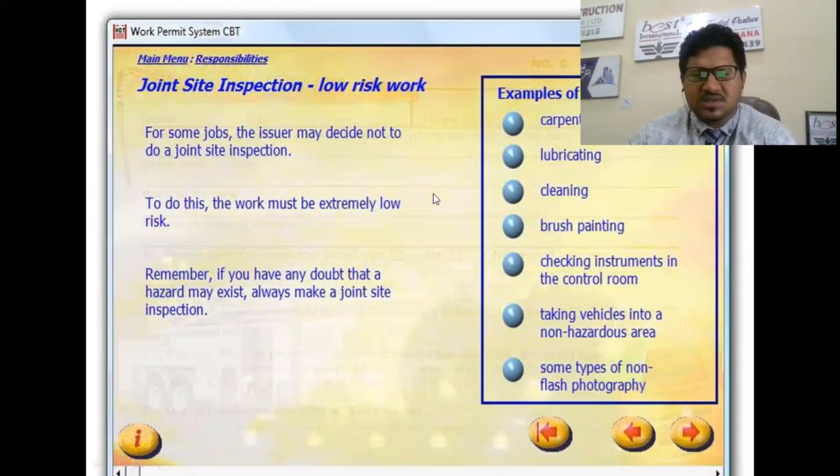For some jobs, the issuer may decide not to do a joint site inspection, but to do this, the work must be extremely low risk. Remember, if you have any doubt that a hazard may exist, always make a joint site inspection. Examples of low risk work may be carpentry, lubricating, cleaning, brush painting. So, who goes on a joint site inspection? Remember, issuer and receiver.

Now, why do we need a fire watch? A fire watch must be assigned anytime work is done where a fire could occur. Examples: when working on or near in-service hydrocarbon equipment, doing a hot tap, working near combustible materials, or working near open sewers or sumps. You may also need a fire watch when a release of hazardous liquids or gas permit is issued.

So remember, guys, whenever, wherever a fire could possibly occur, you need a fire watch, and make sure you have it, and it must be accurate on the hot work permit, like the name of the fire watcher and the ID of that fire watcher. You need to agree and sign the permit.

Now, fire watch, who is he? The fire watch is usually an operator, but he could be from maintenance or a contractor if operations and maintenance agree. Any fire watch must have had fire training and know how to use equipment like fire extinguishers or hoses, and he must know how to report a fire. He must check the work site to make sure all safety precautions are in place. So these are very straightforward responsibilities of the fire watcher.

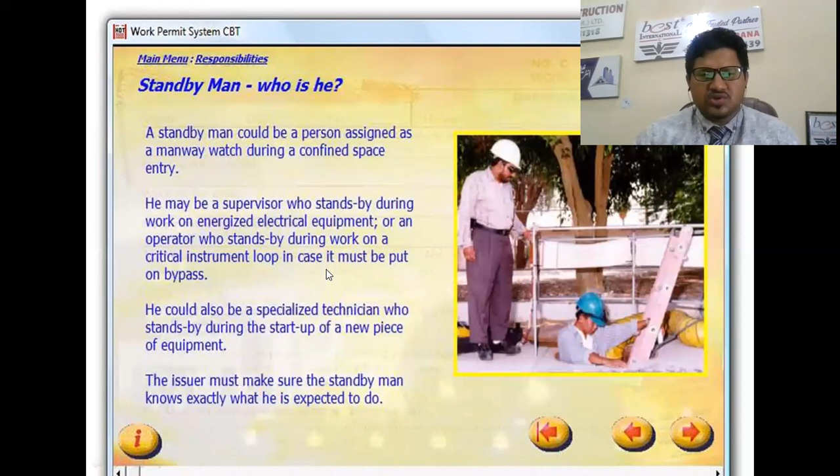Standby man: yes, we need a person who will stay outside at the entry point, and he must be reporting to the CSE supervisor. And on the other side, he has no other duties. He must make sure that everyone who is going inside is filling the CSE log sheet. And the issuer must make sure the standby man knows exactly what he is expected to do. So make sure the standby man is also very clear about his key responsibilities as a standby man.

Now, when should a fire watch be assigned? Whenever a fire could occur. You just need to remember any hot work when gases are above 0.0 LEL for high risk. But the most appropriate answer is whenever a fire could occur. What would the issuer require when welding on in-service hydrocarbon equipment? We need a fire watch, quite straightforward, right?

Now, what must the fire watch be? He must be trained. And on the other side, to be very honest, he must be certified as well. That's why they have started asking, where is your third-party certificate and ID as a fire watcher? Now, the fire watch has to know how to operate fire equipment given to him. That's the right option. Question number 5: what do we call the person who is required to be at the job site because of a special skill he has? We need a standby man.

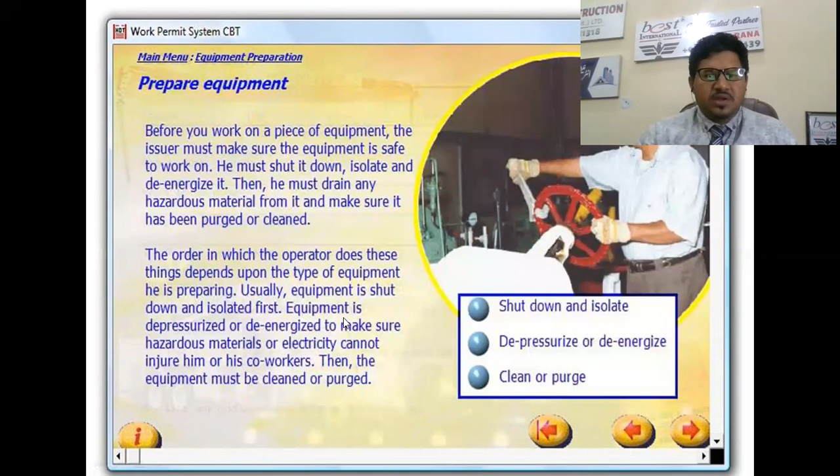Purging is important, and why we need it. This is done to remove hazardous material and it's called purging. Purging is a safe way to remove flammable and hazardous material from inside equipment. It will bring down the LEL towards 0%, and it may remove oxygen content as well, because nitrogen displaces oxygen, and if there is not enough oxygen, of course, people could die.

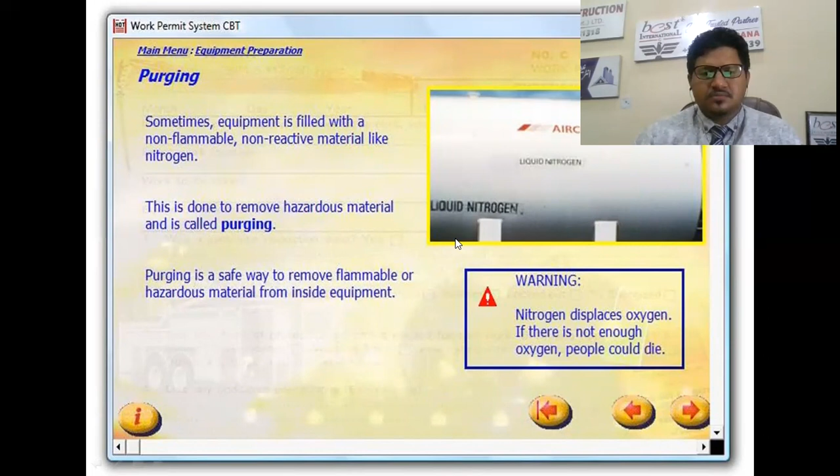Now, clean equipment: cleaning is done to remove all traces of flammable or toxic material that could injure people. This is usually done by steaming out the equipment or using a water wash. Cleaning at this stage refers to cleanliness. So for the cleaning process, just remember you are using either steaming or water wash.

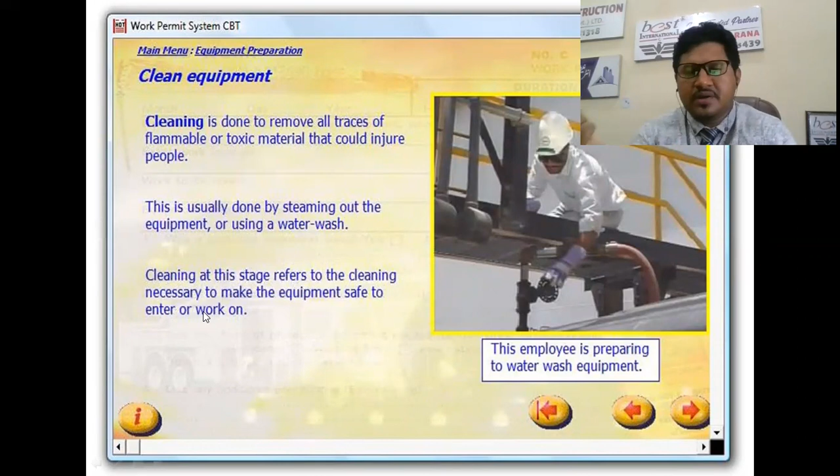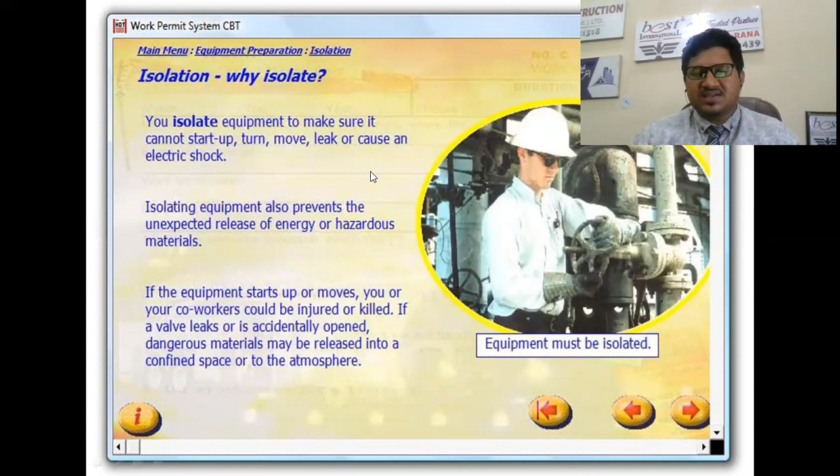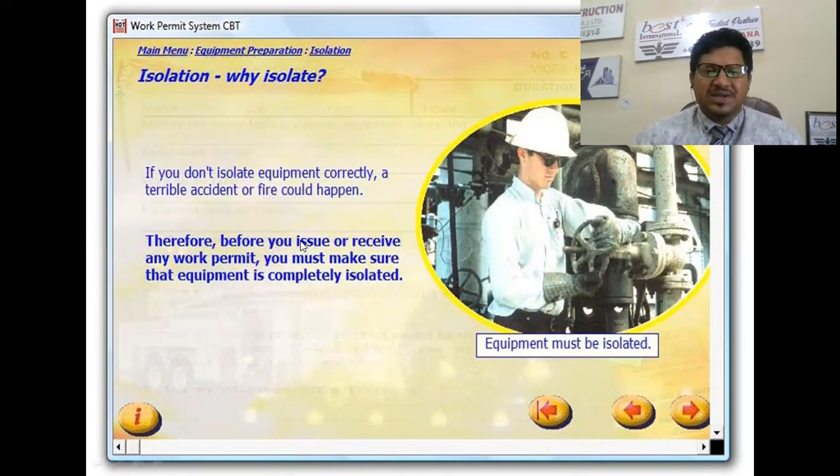Isolation, why do we need isolation? We don't want any accidental startup or unexpected release of energy while we are working at the project site. So make sure you properly isolate the equipment, and there shouldn't be any chance, even accidentally, to release dangerous materials, especially in a confined space. If you don't isolate equipment correctly, a terrible accident or fire could occur. Therefore, before you issue or receive any work permit, you must make sure that equipment is completely isolated.

Now, what should we isolate? Different kinds of energies we need to isolate, or different equipment could be there, like electrical equipment, mechanical, hydraulic, air, gas operated systems, vessels, pipes, confined spaces. We need to isolate before we start our maintenance or inspection or other projects like overhaul or shutdown.

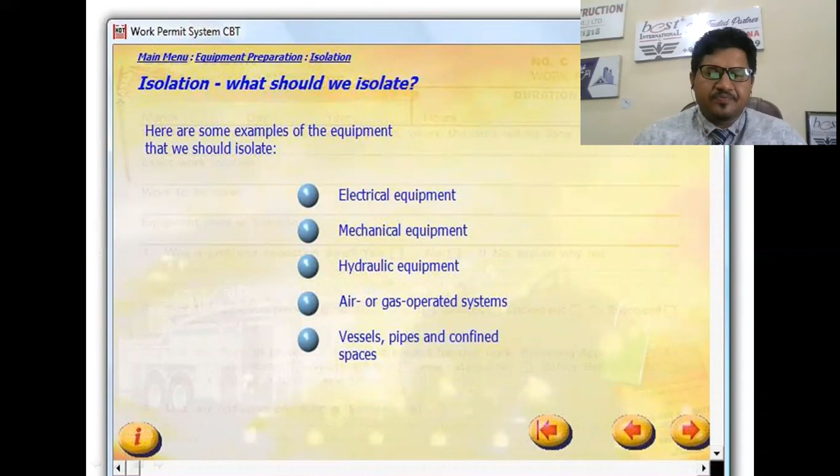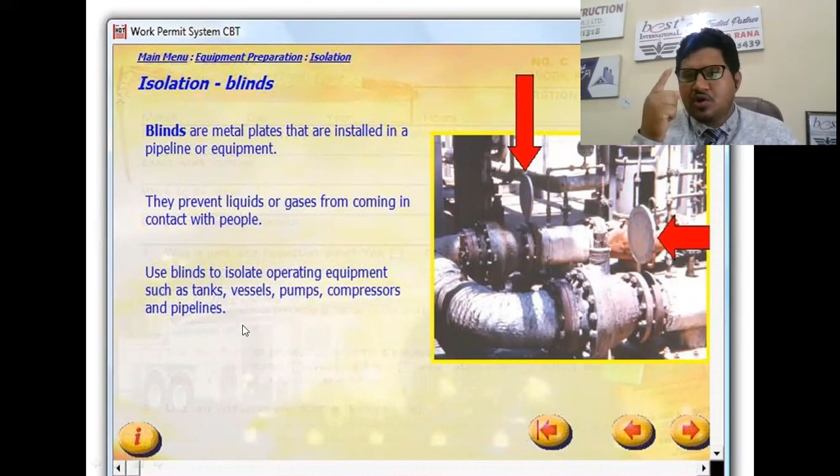Now, how do we isolate? Install blinds, remove piping, close and chain valves, open electrical breakers, remove fuses, disconnect wiring. We can use blinds; these are metal plates that are installed in the pipeline equipment. They prevent liquids or gases from coming into contact with people. So use blinds to isolate operating equipment such as tanks, vessels, pumps, compressors, and pipelines. But make sure facility-made blinds you can only use once, and then you have to destroy and waste them. Look at the picture. We can disconnect also.

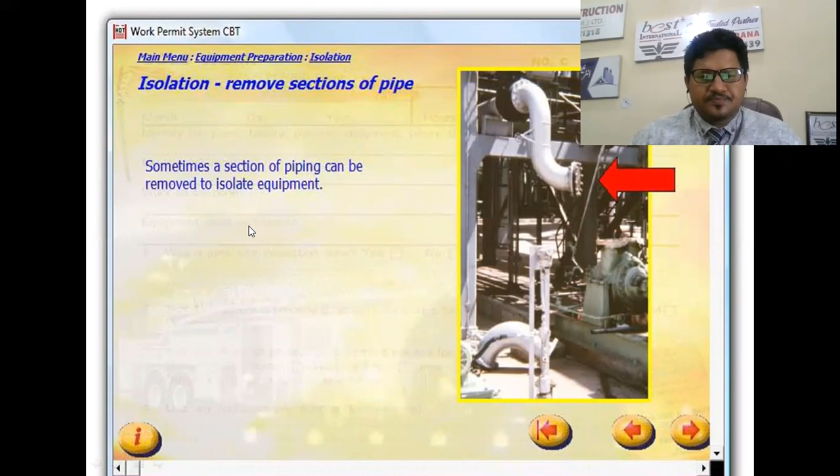Otherwise, we can use chains to prevent a valve from being opened by accident. For electrical isolation, we need qualified electricians, first of all, to disconnect wiring or remove fuses if breakers cannot be locked in the open position, or open breakers. Now, what is the question? This is an important one. When preparing equipment for maintenance work, the issuer must make sure of what? Shut down, isolate, and de-energize. They have to make sure.

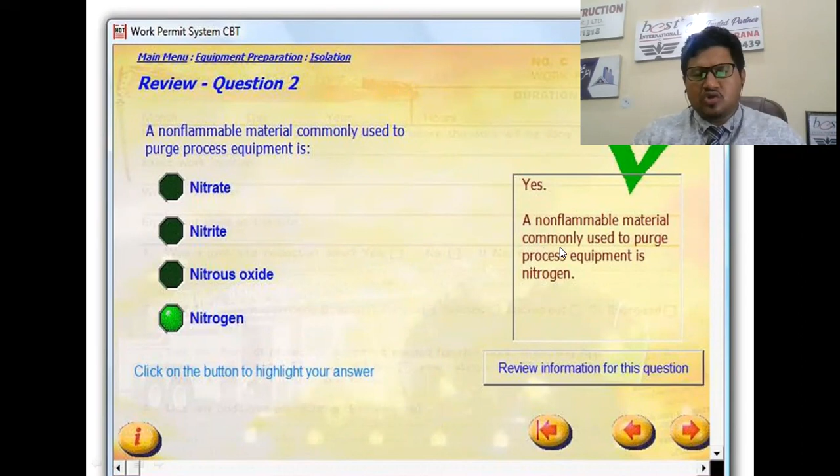A non-flammable material commonly used to purge process equipment is nitrogen. We use nitrogen, a non-flammable material, meaning no flammability. Two common methods of cleaning process equipment include water washing and steaming. That's what you studied. Now, equipment is isolated to make sure it cannot be started up, leak, or cause electric shocks. Choose two methods for isolating equipment: remove piping, or install blinds. So blinding and disconnection are both acceptable methods for confined space isolation.

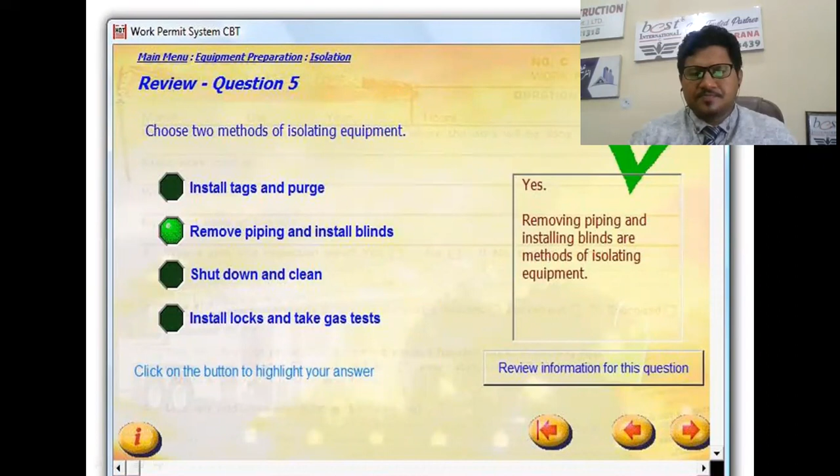Now, removing fuses from an electrical circuit or disconnecting electric wiring is an example of what? Isolating electric equipment. So your concepts technically must be clear. So I hope all these questions of the work permit system of Saudi Aramco will be helping you.

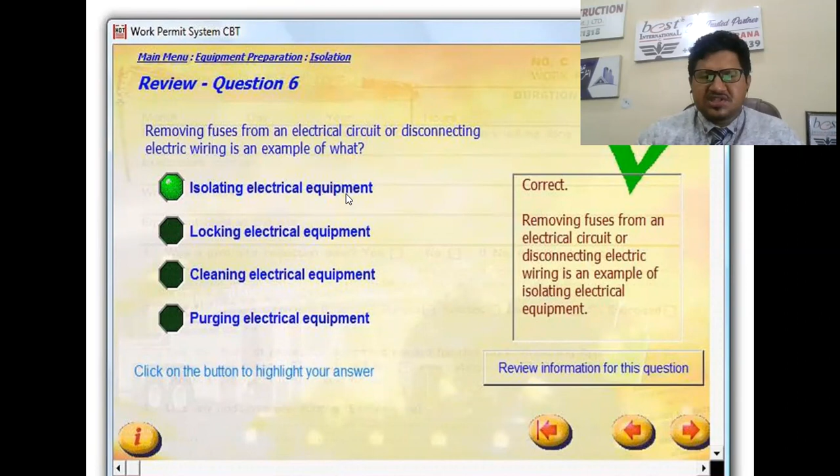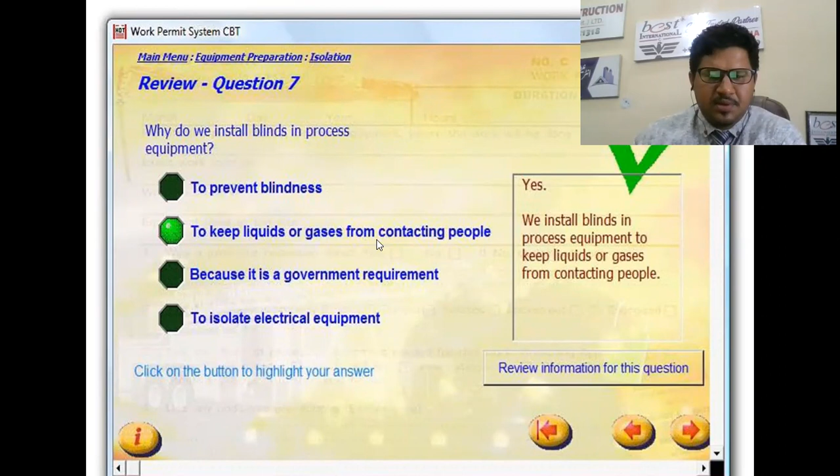Yes, locks and tags must be used in sequence. And remember, operations must install their locks and tags first. So one lock, one key. This is the only program where you should never trust anyone. Your life, your responsibility. You have to put your lock and you have to remove your lock. Don't trust anyone. You can't even say to someone, oh, take my key and just open my lock and remove it. No, don't trust.

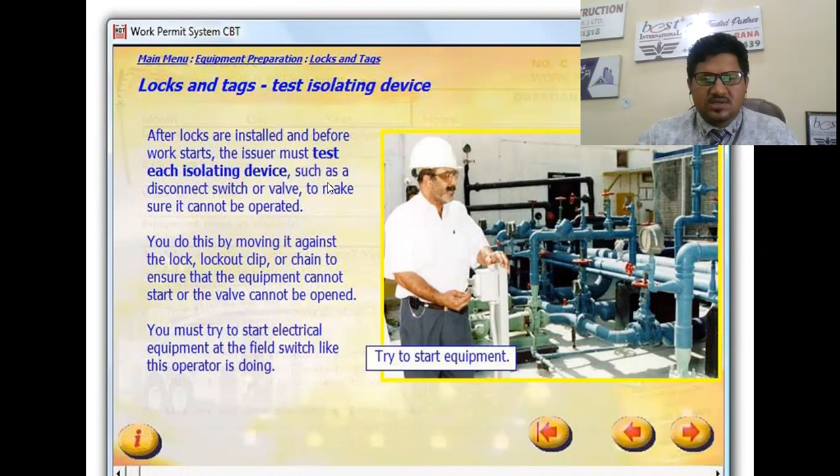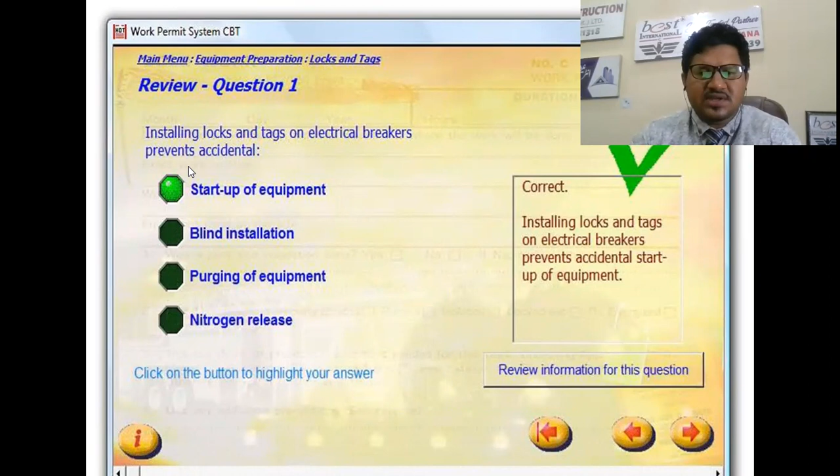So make sure, after locks are installed and before work starts, the issuer tests each isolating device, such as a disconnect switch or valve, to make sure it cannot be operated. If there are multiple locks, we can use multiple lock clips like this, which allow several locks and tags to be installed at the same time. Now the important questions: installing locks and tags on electrical breakers prevents what? Startup of equipment. Why do we install tags with locks? To explain why the lock is installed.

Who from the work crew installs locks? One member from each work crew, but make sure they are authorized and trained. When operators change shift, the new operations supervisor reviews all isolated equipment. He must also review the locations of locks and tags. Operations locks and tags may be left installed, and between shift changes the keys to operation locks may be transferred to the new shift. This only applies to operations locks and tags at a shift change.

Question: the issuer must try to start up equipment at the field switch after it has been isolated and before work starts to make sure... Multiple options are there. Remember, it cannot accidentally start. That is the answer. What happens to operations locks and tags installed on equipment when operators change shift? The keys are usually transferred to the new shift.

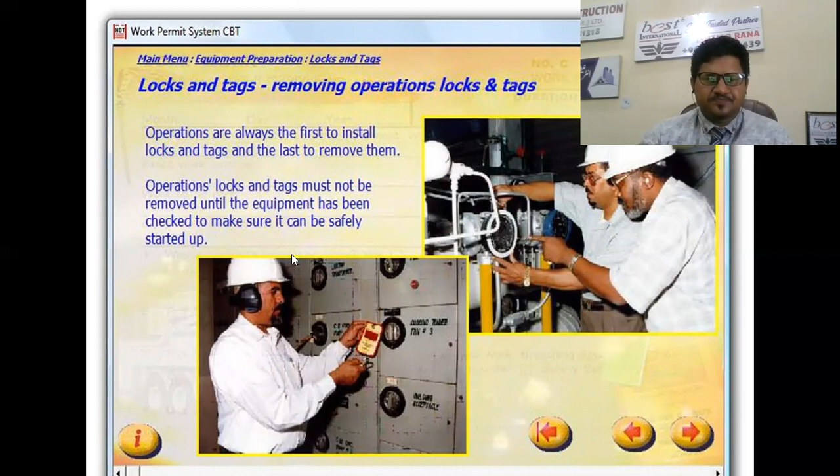So you can study this material. Let me just complete the questions and answers for you. These slides you can study by yourself; one picture is louder than 1,000 words, so see how the pictures are self-explanatory. GI 6.012 belongs to this one. Now the question is, who should be the first organization to install locks and tags? Operations will be the first one to install the lock and the last one to remove the lock. What must operations do before removing their locks and tags? Make sure equipment can be safely started.

Okay, so different types of permits are there. You can study them by yourself. Different permit formats are there. I'll share maybe one more video: what new changes are there in the new permit forms?

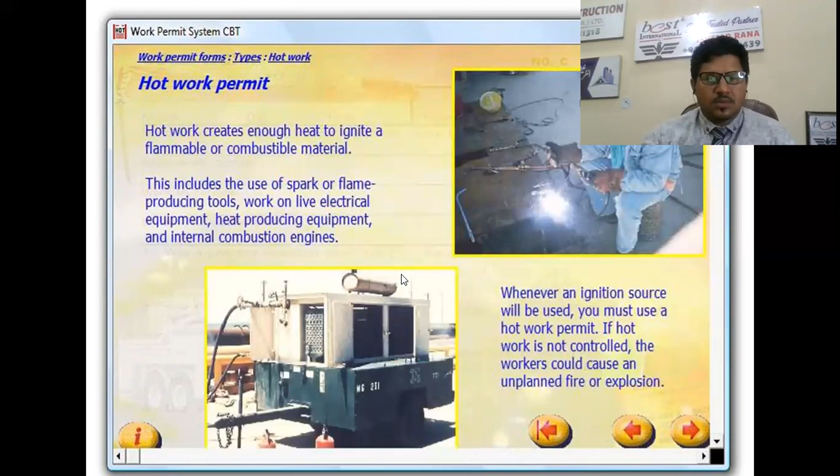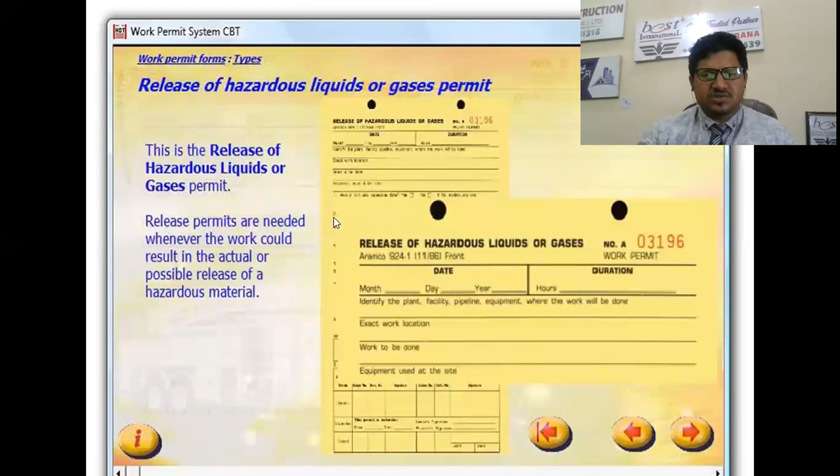Okay, so some of the hot work precautions you can study by yourself. I'm just going to share some of the questions. Okay, I'll just directly go to the questions. So the material you can study by yourself. Now, what is one hazard with doing hot work? Ignition source. One hazard with doing hot work is that an ignition source is present.

Now, the use of an air compressor in an operating area requires which work permit? Hot work permit, of course, because the use of an air compressor in an operating area requires a hot work permit. Now, covering sewers is required by which permit? Of course, hot work permit. What is the difference between hot and cold work? Hot uses an ignition source. Cold work includes sand removal and scaffold building.

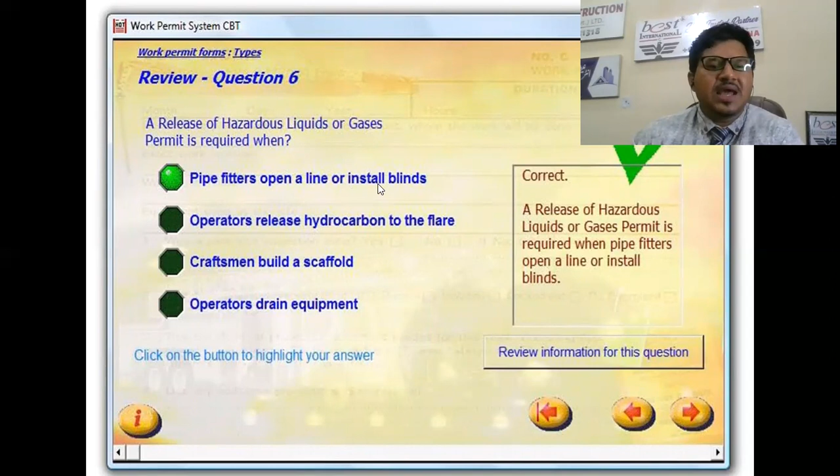A release of hazardous liquid or gases permit is required when pipefitters open a line or install blinds. We need equipment opening line break. You know, the new permit is the equipment opening line break. Now choose 3 things you should check before issuing a release permit or equipment opening line break. So wind direction, drainage, ignition sources. Choose 3 things that are needed before allowing entry in a confined space: lighting, standby man, air mover.

For gas testing, again, you can study some of the material, but remember, there must be some gas limits, so you have to understand. And common gas tests we can do. Why do we need them? Flammable gas to prevent fires or explosion. Toxic gas, so people are not exposed to toxics. But remember oxygen, to make sure enough oxygen is available. Failure to take accurate gas tests could kill your people, because there are plenty of gases like flammable, toxic, and oxygen.

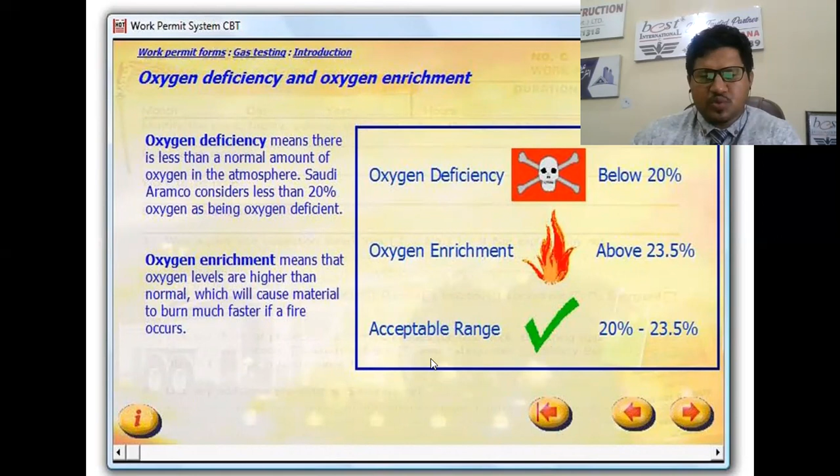So, oxygen deficiency is another, like below 20, or oxygen above 23.5. So, what is the acceptable range? 20 to 23.5. Now, what are the three types of gas tests we take? Oxygen, flammable gas, toxic materials. What is oxygen deficiency? Definitely lower than normal amount of oxygen.

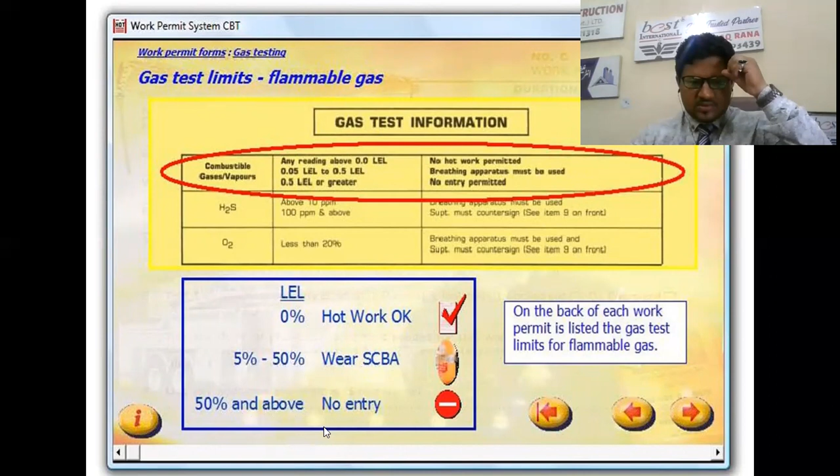So if LEL is 0%, hot work is okay. 5 to 50%, we need SCBA. 50 and above. But now this is like you can say 5 to 10% LEL, you know, we can go with the cold work. Even below 5%, we can say without SCBA, but 5 to 10%, we need SCBA, or 10 and above, of course, you know, no entry at standard level under the new requirements.

Now, let me just go directly to the question, because these things you can just scroll down and read. What does the duration box tell the receiver? When the work must stop. The information entered in the exact work location box is important because it controls where the receiver can work. Why does the issuer need to know what equipment will be used at a job site? It helps him identify the hazards. Now, what must the issuer do if a joint site inspection is not done? Right? Write N/A on the work permit. Why is the checklist section important to issuer and receiver? Make sure important steps have been taken.

Use a fire blanket and hand dig only are examples of what? Additional precautions. What information must the gas tester enter on the work permit? Gas test results, name and the badge number. What should the issuer do if gas tests are not needed? Write not applicable. So what must the issuer write on the work permit? Name, organization code, and badge number. What must the receiver write on the work permit? Name, organization code, and badge number. Who can extend a work permit? New issuer and receiver.

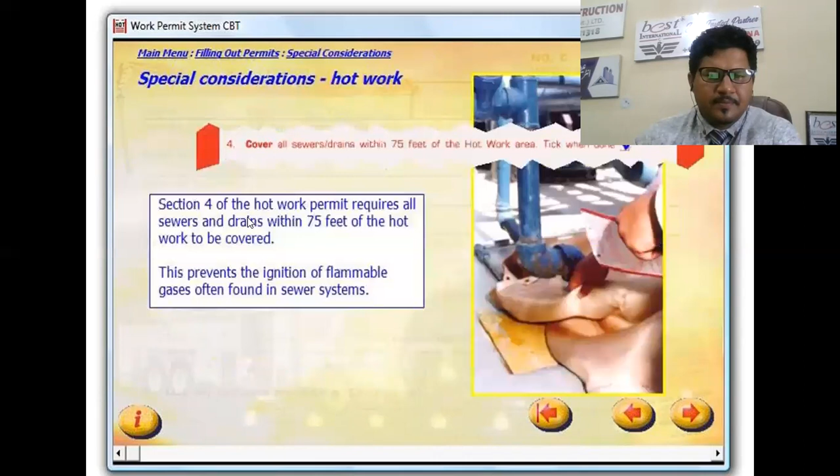Who can close a work permit? Issuer and receiver. Now, where could an issuer find out which permit is issued for a specific job? So on the back of any work permit, but now they're trying to put everything on the front even. So you can study all these things by yourself if needed. Now, the issuer must stop work if the job site was found to be unsafe. Yes, now we're going to talk about some emergencies. A pipe fitter cannot work on the same piece of equipment using a welder's work permit because each type of work involves different hazards. Quite logical point.

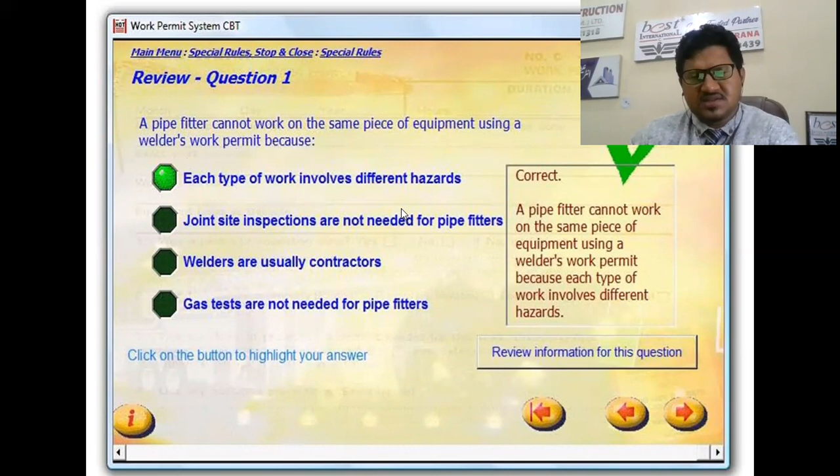A work permit can be issued for up to one operational shift. What happens if work must continue past the time the original permit was to expire? Extend the permit or issue a new one. Who must sign a work permit to extend it? The new issuer and receiver. Who is responsible for safety at the work site after a permit has been extended? The issuer and receiver who signed the extension. Work permits can be issued for up to 30 days if it is highly unlikely that conditions will change. Who must sign a permit issued for up to 30 days? Operations and maintenance division heads.

If a work permit is not issued during an emergency, what must be done to do the work? All safety precautions must be taken. Stop work. Let's directly go to the questions. Now, the issuer must stop work if the job site was found to be unsafe. What must the issuer do with the permit after he stops work? Write the reason on the permit. But I would say write the clear reason on the permit why he stopped that work.

Now the receiver must stop work if the work site becomes unsafe, but technically you have to prove it also. It's not like just your misunderstanding and you believe, oh, this is unsafe, just come out and stop the work, and there is a horrible loss for the company. So make sure whenever you stop work, you are technically, logically correct. And no doubt, safety, there shouldn't be any compromise.